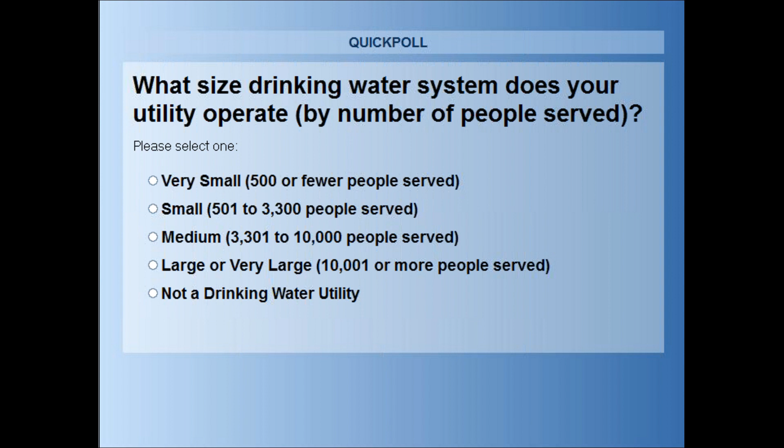Okay, here are the results from that question. Excellent. Well, a lot of you answered not a drinking water utility, makes sense. But those of you who are, it looks like a fairly even spread between your different size utilities there. Glad to see that a substantial portion of you are serving 10,000 or fewer people, which is the focus of our project.

We've got another quick polling question for you. So if you are a utility manager for a drinking water utility, do you regularly see copies of your energy bills? Probably that's largely going to be electric bills, but if you have any other kinds of energy bills that pertain to your drinking water system, you could be thinking of that as well.

And it looks like we've got a lot of good answers rolling in here. And any moment now, Lisa will show you the results. And here they are. Excellent. And a lot of you are not water utility managers, but of those of you who are, it's good to see that a clear majority of you are looking at those energy bills on a regular basis. For those of you who are not, after today's webinar, you might see some more incentives to do so.

And now I'm going to introduce to you Steve Jones. Steve is a principal at Hansen, Allen & Luce Incorporated, which is an established civil engineering firm based in the state of Utah, focusing on municipal engineering, water resources, and the environment. Steve has more than 15 years of experience working on master planning, design of gravity and pressurized drinking and secondary water systems, storm drain systems, sanitary sewer systems, the analysis of drainage runoff, and I could keep going.

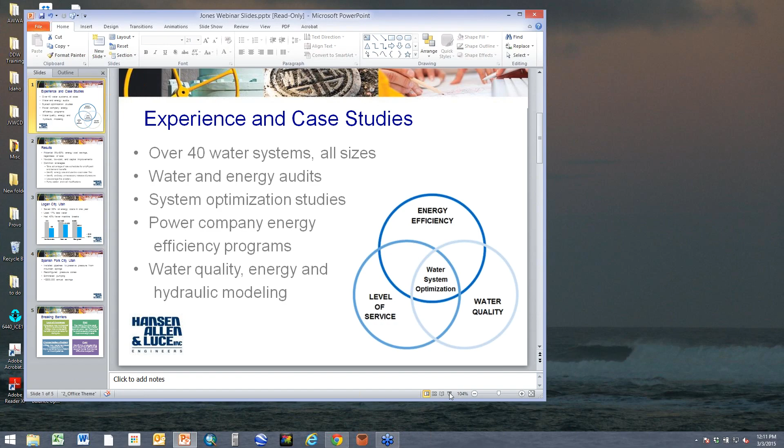Steve's got an extensive resume in this area, and including in the first round of the Small Systems Project, he's helped many water systems identify inefficiencies and develop sustainable solutions that provide substantial savings. I'm going to turn it over to Steve now to talk to us some about his firm's experience and case studies of helping systems like yours save on energy. Thank you, David.

The main point I want to get across is that through my experience over the last 15 years or so of helping water systems be more efficient is that there's significant opportunities to save money. And so start collecting data and organizing your energy management teams and finding that money.

I started out doing hydraulic models for master plans. And as I got into the extended period hydraulic modeling, I started seeing these interesting operation similarities and things like pumping in circles and not utilizing storage, peaking off sources. And I just thought this can't be very efficient. And so I started getting into what I called system optimization studies.

And you can see my Venn diagram there that I focus on saving energy and saving money, but at the same time we're looking at water quality and the level of service. We can't sacrifice water quality or the level of service or the hydraulic performance of our systems going too far into energy efficiency. So it's a balance between all those things. And in reality, most times when you fix inefficiencies, you actually improve system performance and improve water quality. So that's exciting.

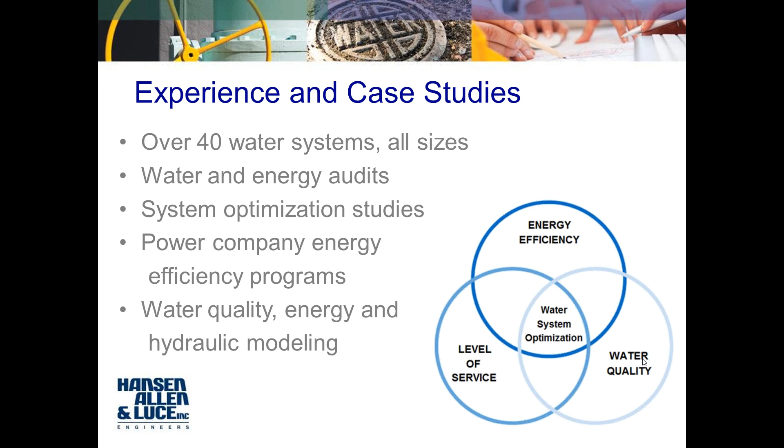And so going to my next slide, the results. For several years I was just preaching this and doing the studies, but it's exciting now to have lots of results. Usually what I see is that all systems that I look at, 5 to 50% in energy cost savings, and that's regardless of size, large or small. And EPA Region 9 just did a pilot study not too long ago where they showed an average of 17% energy savings and an average of 26% in energy-related cost savings. And those are right in line with what I see.

Even the most efficient systems that I look at, if they use energy, there's at least 5% of available energy efficiency measures they can take to save money. And most is in between that, and there's several that are in the order of 50% savings potential there. And that's through no cost, low cost, and capital improvements. And usually it's fairly well split between the no cost and the capital improvements, which is exciting.

There's a lot of things that could be done with that no cost to you, and that's basically what we're focusing on today. Just taking the step to look at your bills, to start noticing how much energy is going on, and taking steps to change that with very low upfront capital.

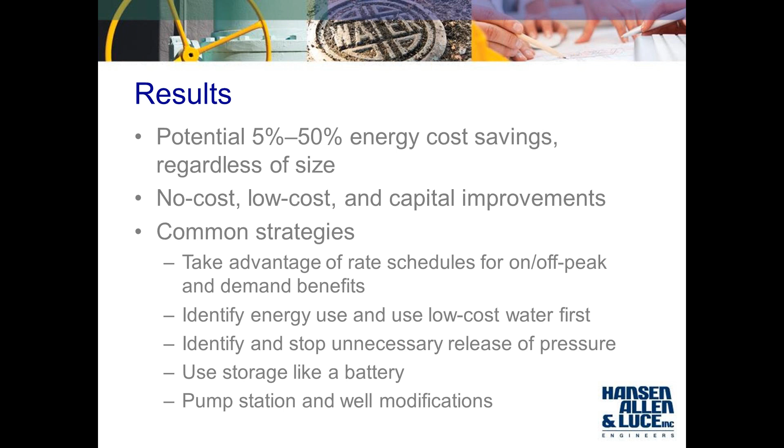So just two quick case studies I just want to throw out there, and then let Doug focus on his. But Logan City, we just did a small project for them last year, where we basically created a new pressure zone and modified 2 wells, and we've got back exciting results from a year later, where they've saved 32% in energy costs. They used 17% less water, and that's not, they didn't use less water in the system. It's just because of the pressure reduction, less water leaked out, which is exciting because that's on top of the energy savings.

And then they had 40% fewer main breaks, and so they're able to put more resources towards maintenance and more productive things than running around and fixing main breaks. So exciting for one little project, and there's much more to do in this city to save energy.

Another quick one, Spanish Fork City, where again we did a project to preserve pressure from Mountain Springs. Again, reconfigured some pressure zones to eliminate pumping, and again, $200,000 of annual savings. So the money is out there. These are kind of the bigger ones, but there's significant money in just the no-cost, low-cost items also.

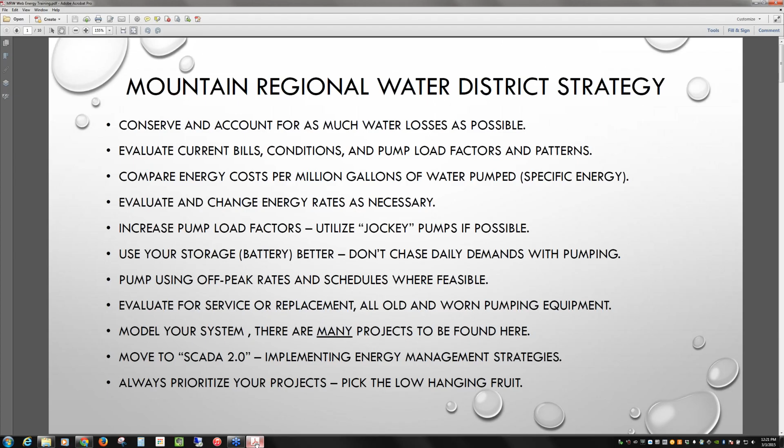And Doug, I apologize to interrupt you right there. I think we may not be seeing your slides at the moment. Do you have a little box you can click on there to change you to the presenter? Are you seeing that on your screen? Let me check, 1 second. Sorry about the interruption there, folks. Remember, Doug, click somewhere, anywhere on your control panel. Change presenter. Yes, you should be able to accept the pop-up window. So, there. Do you see it now? Yes, great. Thanks, Doug. Please continue. Sorry about that.

But the immediate steps we took was to evaluate our energy bills. And we realized that our power utility was not automatically putting people, especially water utilities, on the most efficient bill. And everyone will have different bills, but they'll kind of be similar. By studying how your system operates and understanding your local rate tariffs, you're able to pick a rate that is much more effective.

And simply changing rates on some services so that we could go off peak and pump at night allowed us to accumulate enough money to fund a lot of the other energy efficiency measures we wanted to take. So evaluating rates and learning about them is a continual process. Going off peak is something that we can do in water utilities that no other industry can do, where we pump at night.

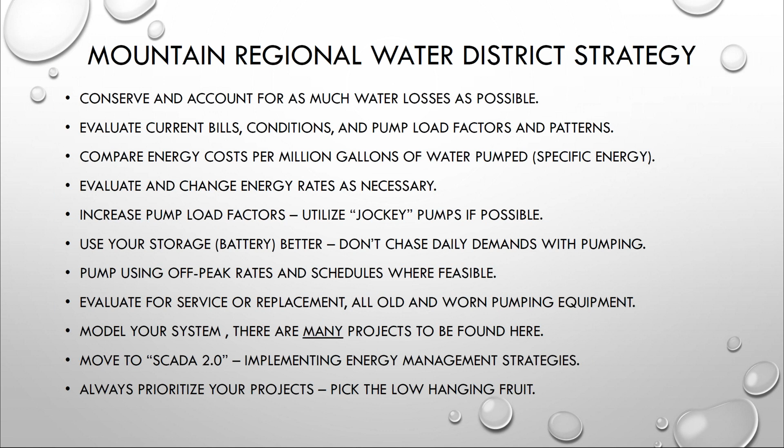And in order to pump at night, we have to do what Steve talked about. We have to use our reservoirs more as storage batteries. We have that ability better than anybody, and we have to allow our reservoirs to drop more so that we can pump in these optimum times. I'm not talking about dropping them to levels that are dangerous, but we have to deviate from a standard that our operators are used to.

The other thing we noticed, which I have noticed as I've talked to many other water systems, is pumping stations and wells operate on a very short load factor, meaning they only pump a small portion of the day. Sometimes less than 20% of the day is used in pumping. And when that is done, we pay much more in not only a power demand charge, but we also pump more water quickly and burn up more energy because of head losses in our distribution systems. And I'm going to talk a little bit about that.

That has been a big thing that we've learned. We also found out, modeling our system, we found many leaks and potential circulation of water. We've also found out that a SCADA change is sometimes necessary to implement energy management changes. One of the first things we found we had to do was prioritize our projects.

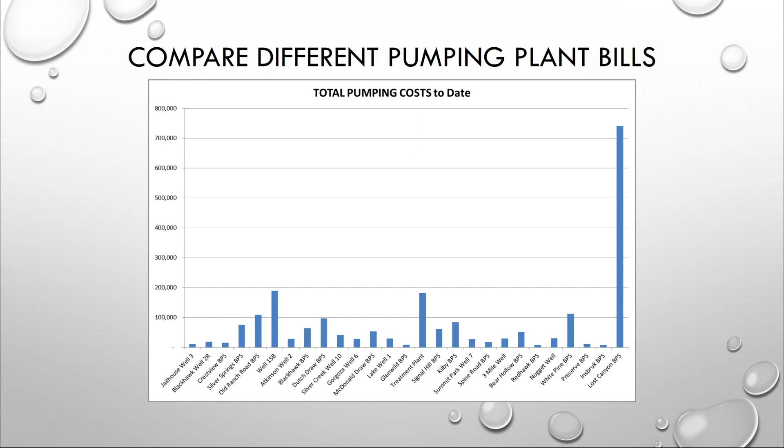This is one of the first things we did. This is a chart of our sources and pumping stations, and of just our pumping costs over a certain period of time, a couple of years. And if you look at that chart, you would immediately think these three tall bars would be our costly sources. But if you go to the next chart and we compare the cost per million gallons pumped, and we call that specific energy, now those ones that were tall in the previous slide are much lower. And this allows us to prioritize which pumps or which sources we run, and some we simply don't run anymore. And this was a real eye-opener to our staff and our operators when they saw what this chart looked like. And I'm also showing energy and power in this chart.

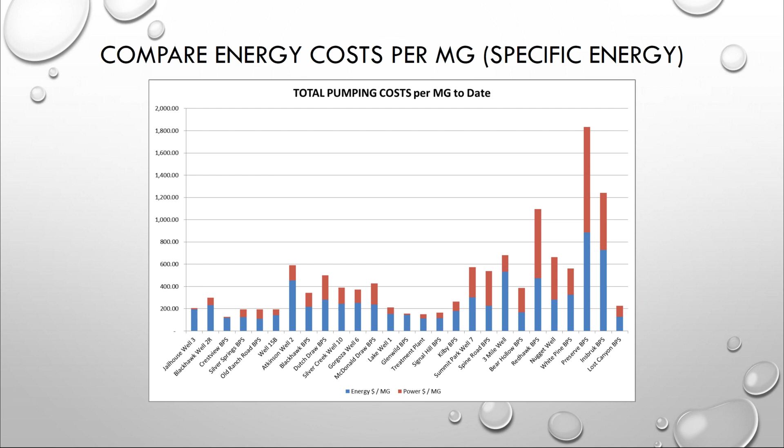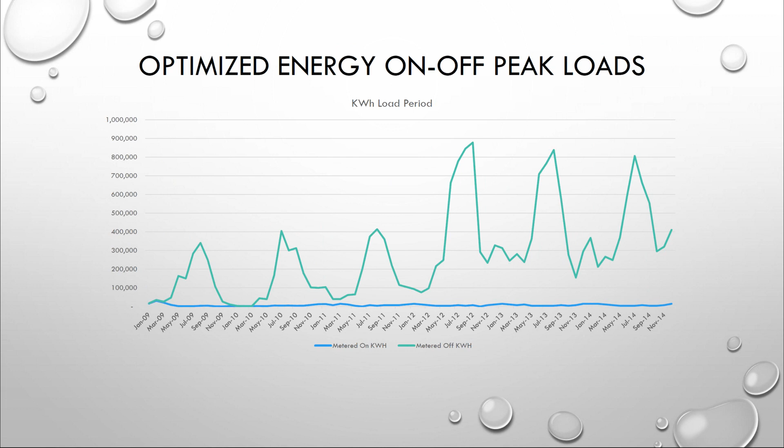This next chart shows what a typical pump station or well in our district would use when you look at the on-peak and the off-peak kilowatt hours. This will be typical of many of our pump stations. On-peak is in blue and off-peak is in green. You can see at the far left, we decided to start going off-peak with this particular pump station. So you see the on-peak load drop considerably. This is more what a pump station in our district would look like if we were totally off-peak. Now you see the off-peak being the pumping load, and that little blue line at the bottom is simply lighting and heating. By going off-peak, we were able to save several $100,000 simply by how we operate our pumps.

This is kind of a pattern that we look for in success, this little chart. This shows in the blue trend our gallons pumped over about the last 7 years. And it's increased considerably, and you can see the linear dotted line showing that increase. Incidentally, that dotted blue line also tracks well with the increase in energy costs in Utah. Our local power company every year has been jacking up costs. The red line is the total cost per 1,000 gallons. And you can see how it drops even during continual rate increases. And this is really kind of the sign of how we want a water system to look when they've implemented these programs.

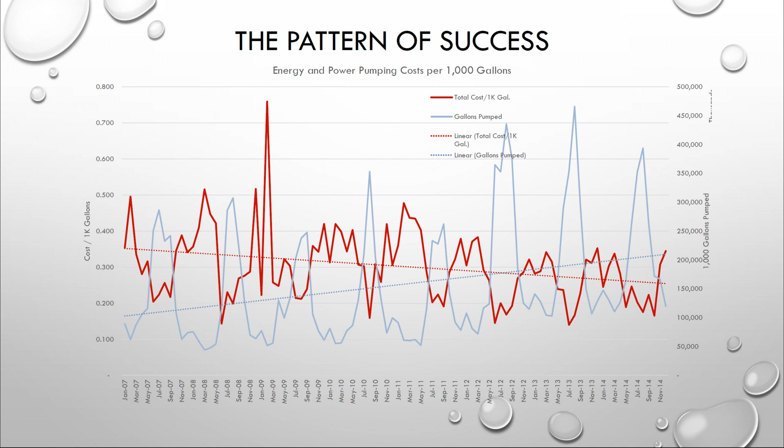This is kind of the last slide. This is the bottom line. A couple years ago, our bills would have been about $875,000. We have since knocked off, initially, we got down to about $300,000 in energy management.

We're about halfway into the green pie and a little bit into the purple one, where we've been doing some other projects. So we're actually now pushing $400,000 a year. We've chopped off that, so it shows the remaining energy. We've almost cut everything in half through simple energy management. That's all I've got.

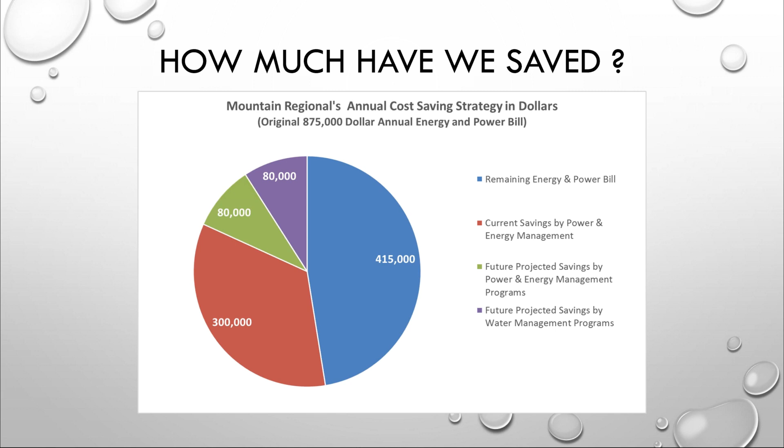Thanks very much, Doug. And again, everyone will have an opportunity to ask questions of all of our panelists towards the end. Right now, I want to introduce my colleague, Dawn Nall. Dawn has a BS in chemical engineering from the Rose-Hulman Institute of Technology in the state of Indiana. Dawn is a licensed engineer intern.

Her experiences include working as a wastewater treatment plant operator, a manufacturing engineer, design engineer, and is currently a program manager working with the Wichita State Environmental Finance Center. Dawn has designed and overseen construction of water treatment and distribution systems and wastewater systems as well. She has worked with federal, state, tribal officials, and many others.

Dawn also works with another one of our environmental finance centers, the Southwest in New Mexico. Since joining them in 2006, Dawn has presented trainings around the country to water and wastewater systems on topics including asset and energy management, rate setting, capacity development, construction cost estimating, water treatment, operations and maintenance, and operator certification.

Dawn has also been involved with the network in various other projects such as leak detection, green projects, source water protection, and many others. Dawn, take it away. All right, thank you, David. So we're going to get into the bread and butter here of energy management for small water systems. Today we're going to look at teams, baselines, and data.

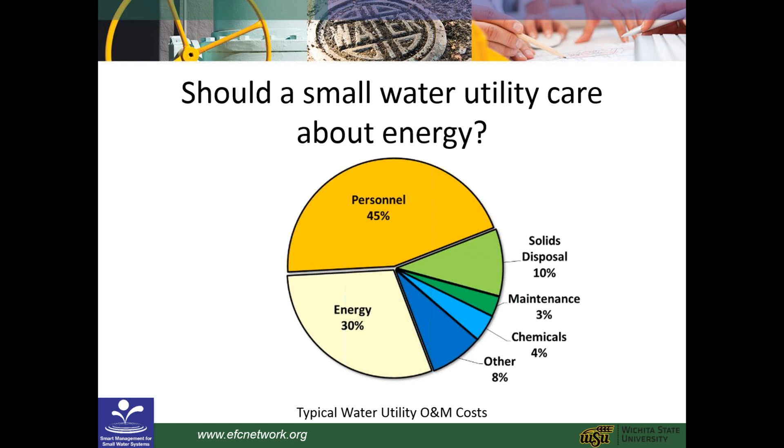So should a small water utility care about energy? I think that we've talked enough today to hopefully grab your interest, but here's a little graphic that shows an example of a typical water utility's O&M cost. You can see that the energy expenses are 30% of their O&M cost. Would you like to make that slice of pie smaller for your water utility?

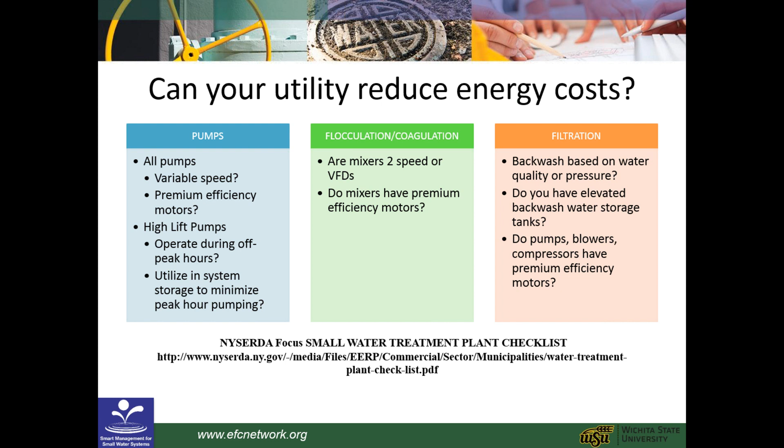For example, it will say, do you have low lift pumps? If yes, you get 1 point. If you do have low lift pumps, do you have variable speed control on the pumps? If you answer no, you have 1 point. Are your low lift pumps equipped with premium efficiency motors? No is 1 point. So each category has a set of questions, and you can answer yes or no and determine if you have potential to reduce your energy.

This is the remaining 3 categories. So there are questions about disinfection, residuals management, and other questions. So again, for example, does your plant currently haul residuals to another location for processing? Yes is 1 point. Are your residuals currently used as part of a beneficial reuse program? No is equal to 1 point.

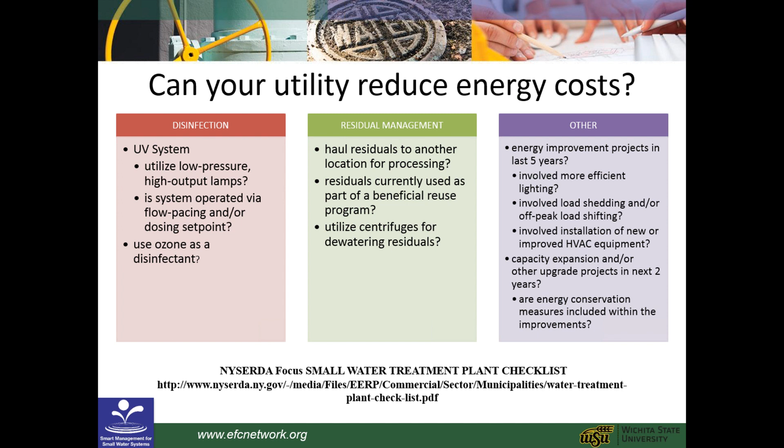So you can go through the checklist and get an idea if you have a good potential to reduce energy. And if you score more than 5 points, there is great potential to reduce energy use. So if your system has potential for energy savings, and you can agree that one of your goals is for your water system to provide services for reasonable and fair user fees, then one of your goals is also reducing your energy use. So how do you go about getting started?

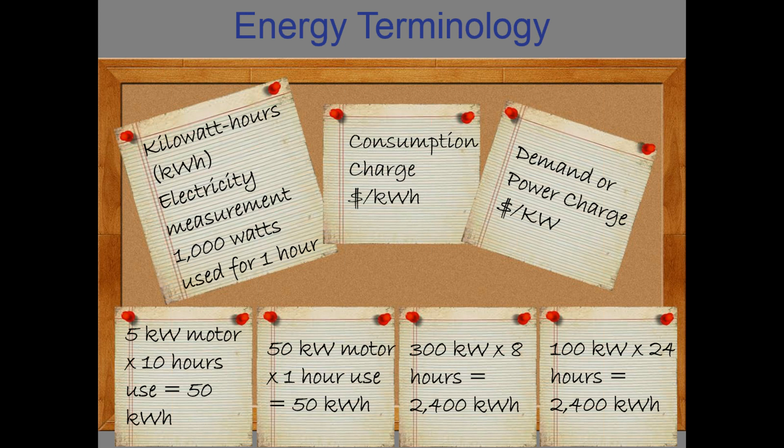If you have 2 businesses that both use 2,400 kilowatt hours per day, and one uses the energy uniformly during an 8-hour day at a constant demand of 300 kilowatts, they still use that same 2,400 kilowatt hours. The other business operates 24 hours a day, and they consume a constant rate of 100 kilowatts. So again, that same 2,400 kilowatt hours.

So even though both businesses use the same amount of energy, the first one places 3 times the demand on the electrical system and needs 3 times the generating capacity. So the peak demand charges would be higher for that system that has the 300 kilowatts over 8 hours. So that's why it's important to understand how your system's using energy and to control your peak demands.

So the peak demands can typically be 30 to 60% of the overall cost of electricity. You can lower the variability in electric demand over time, flatten out your demand curve by minimizing changes in peak demand, and by shifting loads from peak periods.

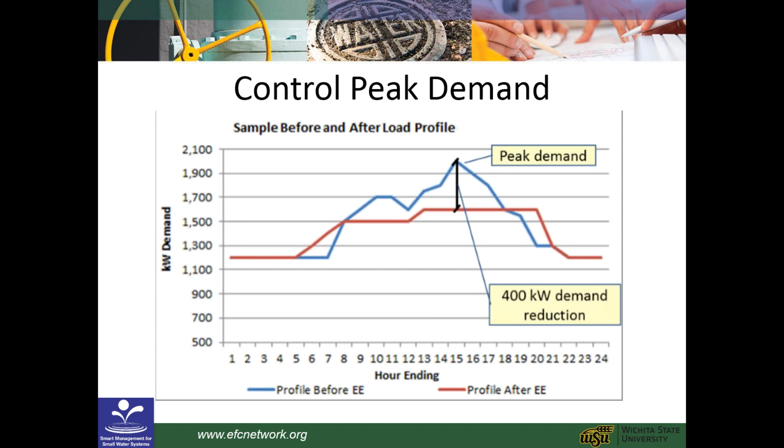Peak periods are oftentimes daylight hours, so if you can shift to operating in off-peak periods, you can make a significant difference. And you can find these cost savings by doing things indirectly, by having supplemental storage tanks, the battery that we talked about earlier, or by shifting loads to off-peak periods and minimizing the overlap between treatment processes.

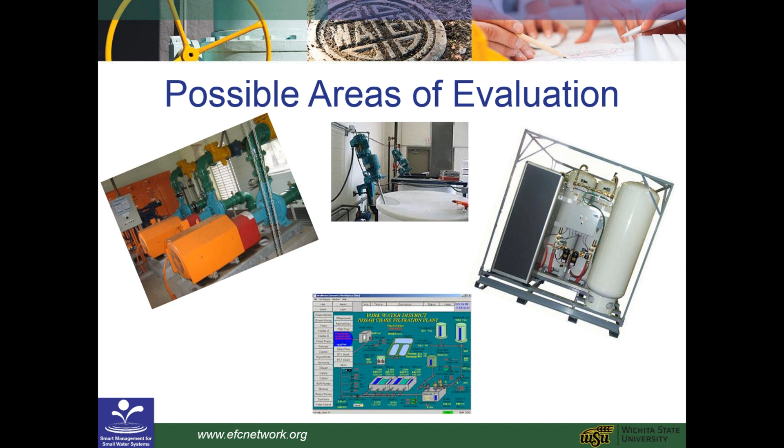Step 4 of the process is to identify your energy efficiency opportunities. So once you've completed the first 3 steps, now it's time to start making a list, identifying potential projects. You want to list nearly as many projects as you can think of. Don't limit yourselves initially because you think something seems unlikely or seems unreachable. Green projects and energy efficient projects are often funded differently than the typical capital improvement project is, and we're going to go into detail about that in our 4th webinar. So just make a list of everything that you can think of.

Whenever you're looking at energy efficiency opportunities, you want to know that they're defined as any system change that helps to reach a stated energy management goal. And then once we get into the next steps, we'll start to prioritize that list and figure out which ones we need to do first, which ones are cost effective, and the graph that Doug had, you'll kind of come up with something like that to help you figure out where the low-hanging fruit is, where the gems are.